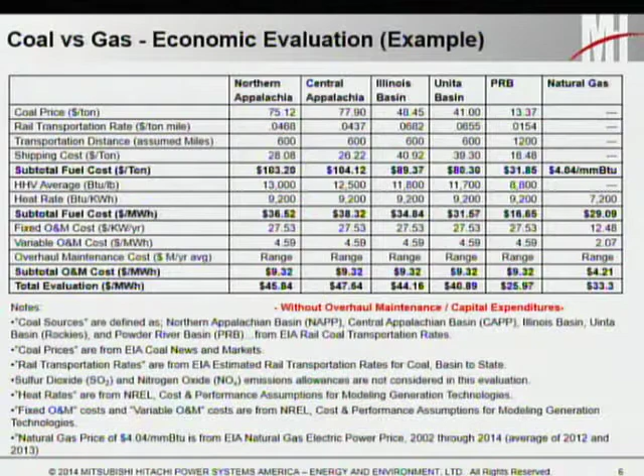So when it comes to an actual natural gas conversion from coal to gas, you have a lot of things to consider. Again, a lot of people think it's just a burner job - you need to change the burner from handling coal to gas, but it's significantly different from that.

You would equate it to changing your car. If you decided, instead of running gasoline in your car, you wanted to go to something as drastically different as coal is from gas, it would be like changing to wood chips for your car. Obviously, there's going to be extensive modifications needed to get your car to work on something drastically different than gasoline and be able to perform at the same speed that you wanted it to.

So the first thing is the boiler design is specific to its fuel source, and not just coal, oil, or gas, but even the type of coal, oil, or gas. So the furnace height in the boiler is sized originally on these coal units for whatever kind of coal it was actually going to burn, and the entire boiler is designed for that.

When you switch it to gas, a couple of things happen that have significant impacts. The main one is the coal flame is very bright and radiant, the gas flame is not nearly as bright and radiant. So inside the furnace, any part of the tubes that sees the flame is going to get much less heat transfer from gas. What that really means is you're going to have trouble making your steam temperature when you go to gas inside the furnace and in your superheat, because you're getting much less heat in that specific area.

Even though you're throwing in the same amount of BTUs, it continues to act differently as it goes through. When you get through the actual furnace and into the convection pass, the back end of the boiler, gas has a much heavier weight to the flue gas constituents, which means it can transfer heat better than flue gas can of coal. Now combine that with the fact that gas doesn't have any ash, which the coal units are designed to accommodate for in the back end - you're now throwing more heat on the back side of the boiler where there's no ash layer covering any of the tubes, and you're starving the boiler for heat on the front side because it doesn't have that bright radiant coal flame.

The last thing I'm going to go into, which is kind of a very controversial thing, is the electrical hazards area on code. Code talk is typically very boring - I only have a couple slides on it, but there are a lot of issues concerning what needs to be done when you put gas near a coal unit that has wiring and motor control centers that were not intended to be close to a gas source.

Because all those wiring and motor control centers are ignition points close to a gas source. If the gas source were to leak, it's obviously a hazard, and per code, you may or may not have to make any changes. But it's a very confusing code, and I'm just going to briefly go into why people are confused and what some people's opinions are.

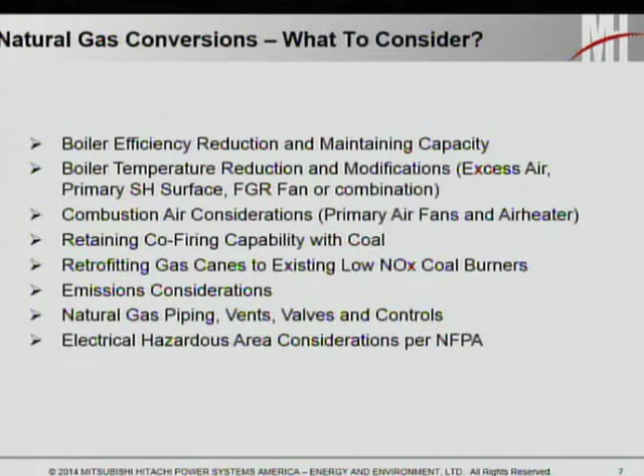So there's very long text here on this, but I'm going to go through each one of these with pictures to make it a little easier.

The first one's very easy. Although your efficiency's down, what do you have to do to keep up? You fire more. Usually the coal units had a spare row of burners, which is very easy to accommodate now - you're going to fire all your burners. You don't need a spare when you're going to gas anymore, so you usually have the ability to add more gas to make up for that lack of efficiency that you're going to get.

But the second bullet here is a little harder to do, and that's the steam temperature. It's very easy to increase your excess air, but you typically don't get a whole lot of extra temperature from it, and it usually doesn't result in getting to the point where you want. You could also add extra surface to your superheater or reheater to get more steam, but that involves changing out very large pressure part components, which can be very expensive, and most utilities want to avoid if they can.

The third one is the most common one, and I'll tell you why. Adding a flue gas recirculation system takes hot gas coming out of the boiler and throws it back into the furnace, where the air temperature going in was much cooler than it is now when you add gas recirc to it. That helps you get to that steam temperature so your steam turbine can still operate where it's supposed to. The second item here we have for reducing your emissions - there are a couple different burners you can do.

A multi-lance burner is the best for wall-fired emissions. That can spread the flame out, but it's a little more expensive as opposed to a solid gun on the inside. You can also add over-fire air if it's not already on there in order to try and get that NOx down a little more.

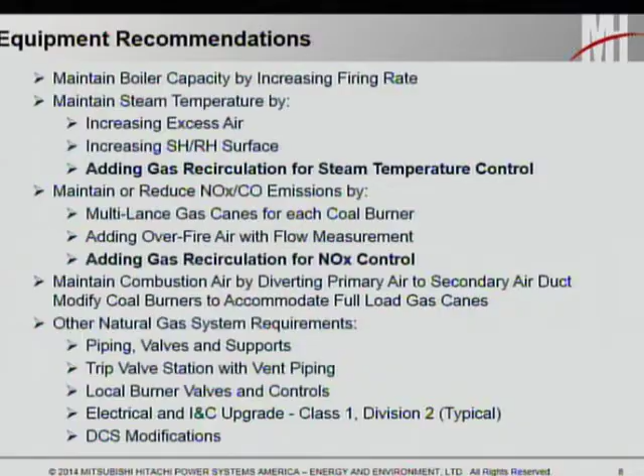And the last one is flue gas recirc again, because you're taking flue gas back in that has much less oxygen than the original air. It's very effective at reducing the NOx. So your two main problems that you have on here are both handled by the same thing, which is this flue gas recirc.

That being said, that's not the easiest thing to do, because now you need to fit something on the back end of a boiler that has fans, foundations, ductwork on something that wasn't typically designed for it. But in a lot of cases, that's the only way you can really get your steam temperature and emission issues resolved.

For your combustion air, when you actually lose your primary air, you need to make some sort of bypass duct in order to take the air you were using to go to your pulverizers and throw it back in so that you don't lose that volume. But that's only on a case-by-case basis. Sometimes it's not needed at all, as a lot of times we found.

And then all the other systems, in order to get the gas from inside the fence up to the actual burner front, are fairly significant when you consider each one needs pressure reducing stations, flow control valves, and vents in order to go to the top of the boiler roof to be in compliance with code. So all those things are a little more expensive than most people realize when they just look at, oh, change the burner out to coal from gas, or from gas to coal, I mean.

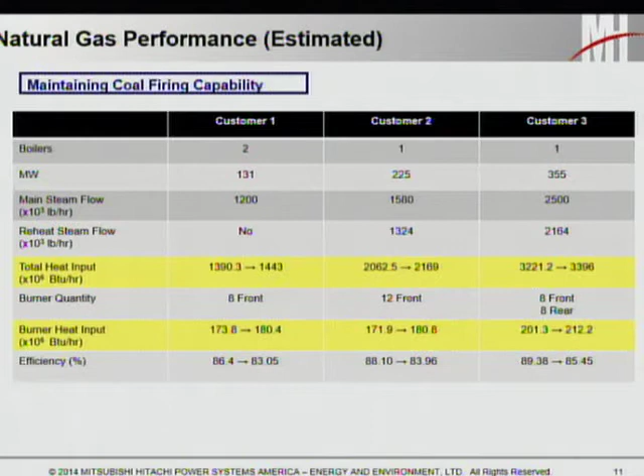So because of that actual loss, you have to make up for that by firing more. So you can see what happens. In order to maintain your capacity, you have to increase the actual heat input you have. That's the efficiency change needed to make up for it, because you don't want to lose any of that capacity that you've already set up to send out to the grid. You already have your switch yard outside ready to go. To not utilize that would be a gross waste of whatever your cost justification is for the megawatts available for the project.

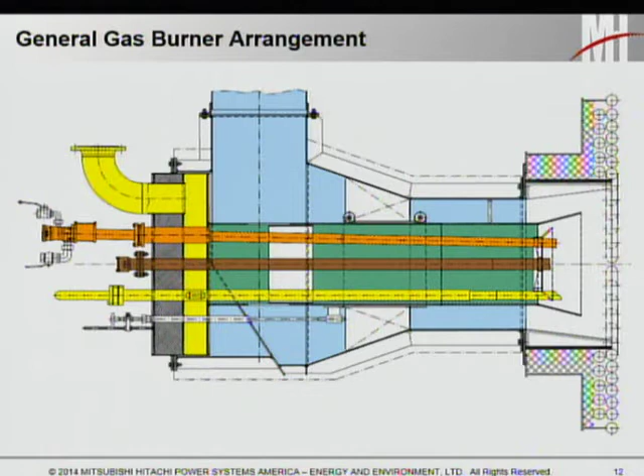So when it comes to the actual burner side, what needs to be done - this is a cross-sectional view of a gas-only burner, just to give you an example. You can see the yellow is a gas spud coming in around. There are typically a bunch of them going right around the face. In a picture, it looks something like this. This is in order to get the best emissions you can - a multi-lance gas burner is the best for it.

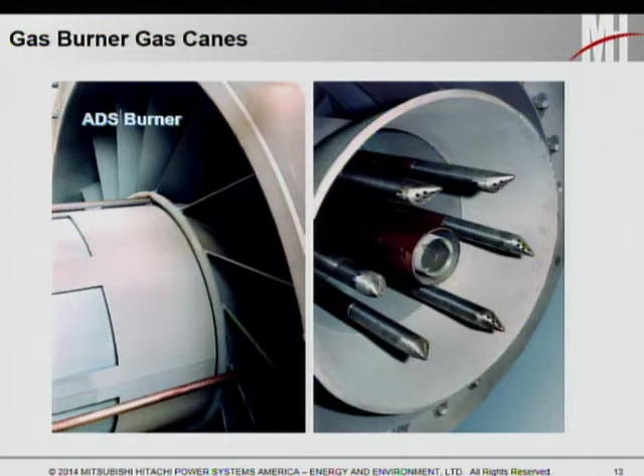By doing this, there are a couple things that you save. The first is, instead of manufacturing a whole new burner and taking the time to haul it out and put another one back in, you're just manufacturing gas lances, and the only time you're taking is inserting those gas lances through the wind box into the tip.

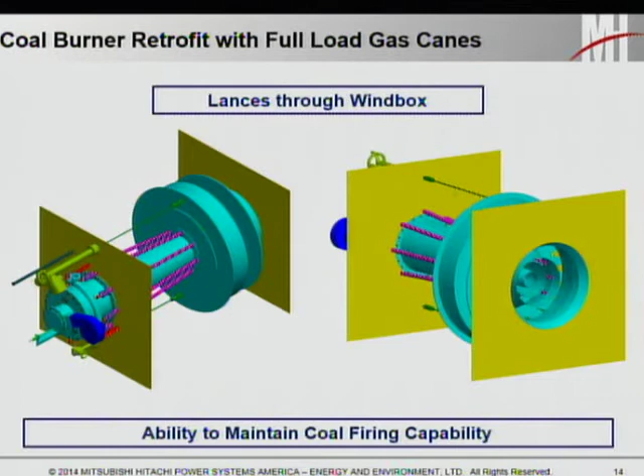You almost duplicate that gas design by putting the tips on the outside, and the coal, which comes down the center, is completely unimpeded. So by doing this, it's not only a cheaper alternative, but it also doesn't do anything with the coal burner in case you wanted to keep it. Whether you want to keep it or not, it's still usually the recommended method, but if you did want to keep it, coal is still a very viable option on this type of wall-fired burner.

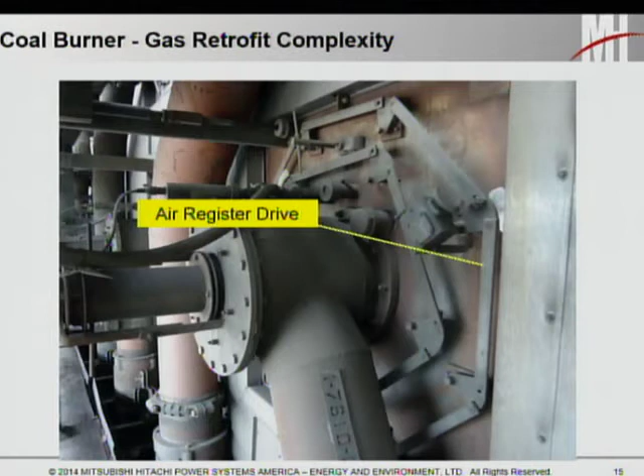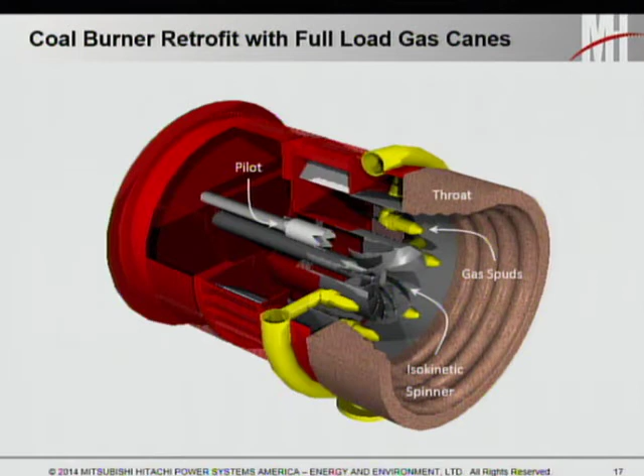This kind of just shows you a cross section here where you have the ring header and it cuts in. And this actually shows a picture of one of the units we're looking at right now. It's fairly simplistic—you have your gas piping coming in, and the performance from a NOx standpoint is almost as good as it is from an actual gas-only burner, except now you can run coal with the same thing, and you didn't need to modify the burner as far as pulling it out and pulling it back in. You're just making small, minor modifications.

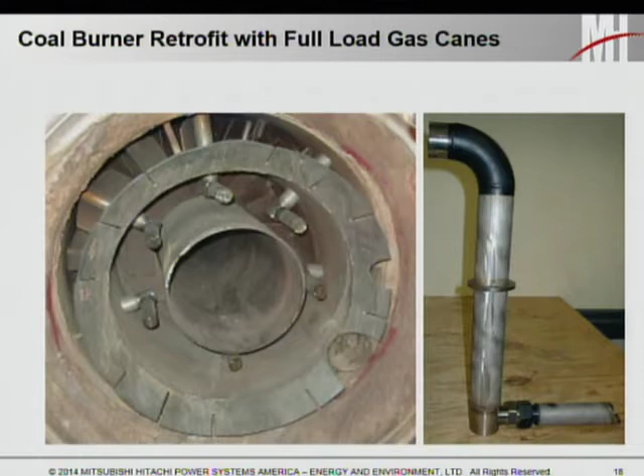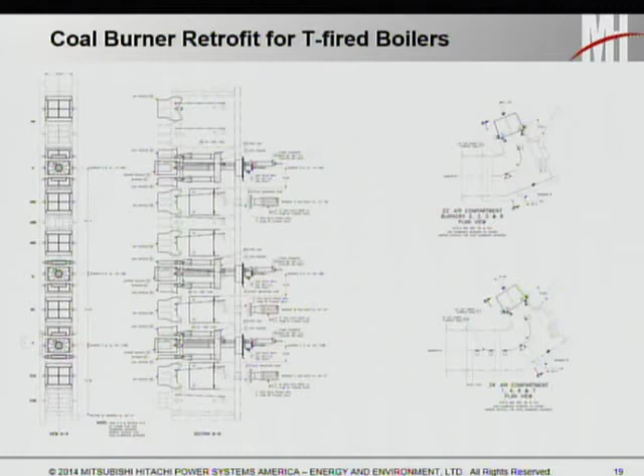We can do this with T-fired units as well. It's actually easier because most T-fired units have spare compartments that were left available for oil or other types of fuels to put in. So it's very easy—I'll show you a picture here.

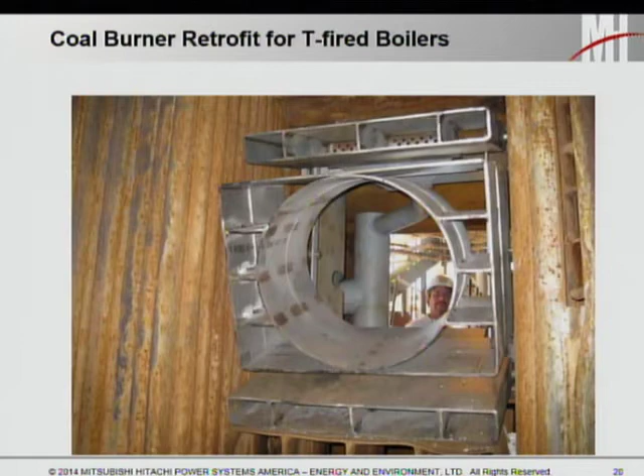These are basically the new gas burners going into a T-fired unit on the top and the bottom. You left this open part here where you can see this is the gas header coming in, and it gets brought in on the top and bottom, and the angle, the tilt, is still fully functional, so you can actually adjust in order to get better NOx production out of it.

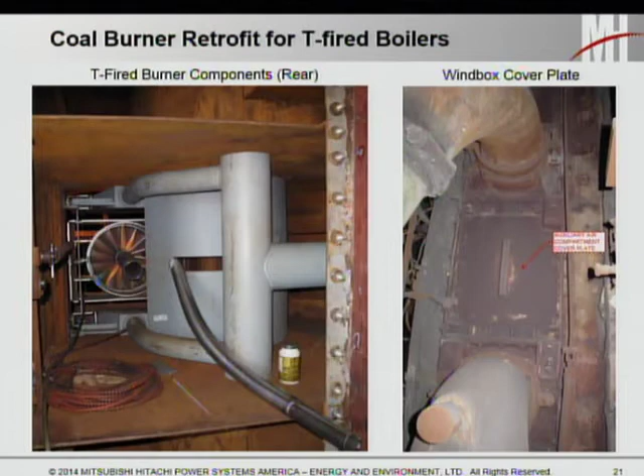This is just a back view here where you can see the two gas spud burners coming in, and from the outside of the wind box here you can see this is the auxiliary compartment that is available on almost all these T-fired units, unless they want three different fuels—coal, oil, and gas—which is very, very rare. This compartment is typically what we'd go to use, and it's actually easier than the wall-fired units. Here's a picture of what it looks like when it's actually operating.

So Flue Gas Recirc is the next item. This, again, is to take care of your steam temperature as well as your NOx emissions. It's fairly simplistic in design, but fairly expensive in installation. When your boiler flue gas comes out, instead of going into the air heater, you take a portion off and put it through a gas recirc fan. This fan has to be controllable to a certain amount so that you can operate it to maintain that steam temperature and the NOx emissions. At low load it should be lower, at high load it should be higher, and so on and so forth.

After the gas recirc fan, you typically send it into the wind box through some type of mixer that blends in with the burners to get your lower NOx. That also provides better temperature, and if you need to, you can also provide that flue gas down at the bottom of the boiler to get temperatures up in a lower case, but that's a little more rare. In any case, this flue gas recirc solves most of the problems, but it has its own expenses with it.

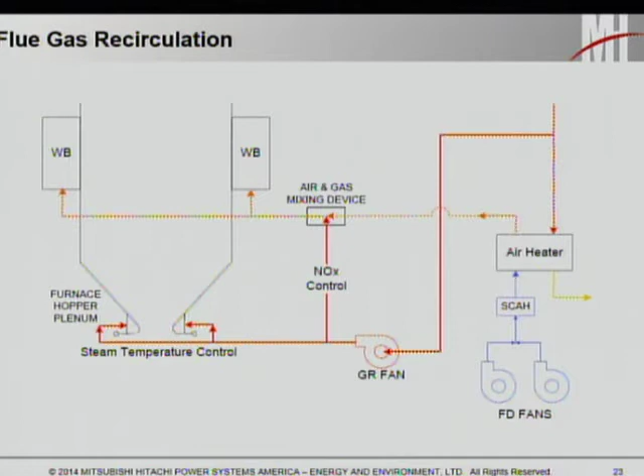On a smaller unit, this is 100 megawatts. It's kind of hard to see with the black, but this is the actual boiler outlet, and everything in color is the new ductwork here. This pink is the flue gas coming into the fan, and then it spits out here into the green, which mixes into the wind box, this dark blackish color going back in. It doesn't seem so bad here, but remember, this is a 100 megawatt unit. It's one small gas recirc fan that doesn't really need a foundation, can probably go on structural steel, and it's not so bad.

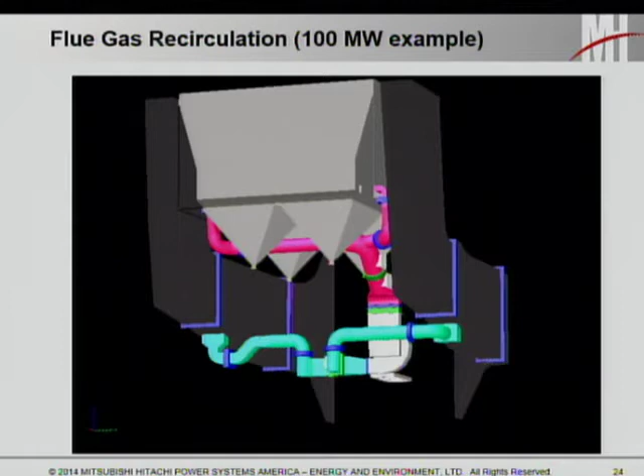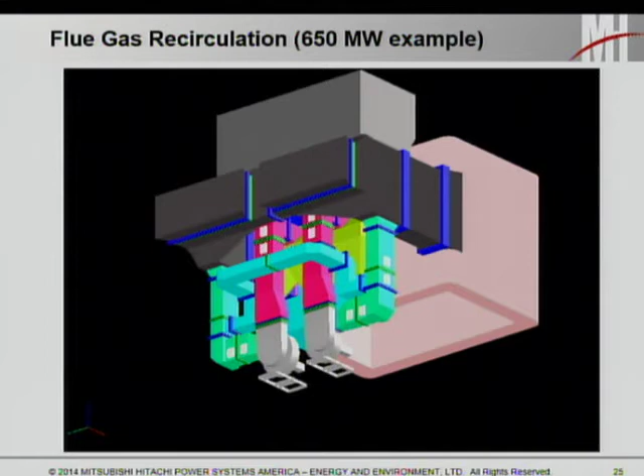But when you look at a 650 megawatt unit, it's much more crowded. You need multiple fans, and these need full foundations and much more extensive ductwork. But again, it's a 650 megawatt unit, so you're getting more bang for your buck. It's just a little more complicated and a little harder to fit in.

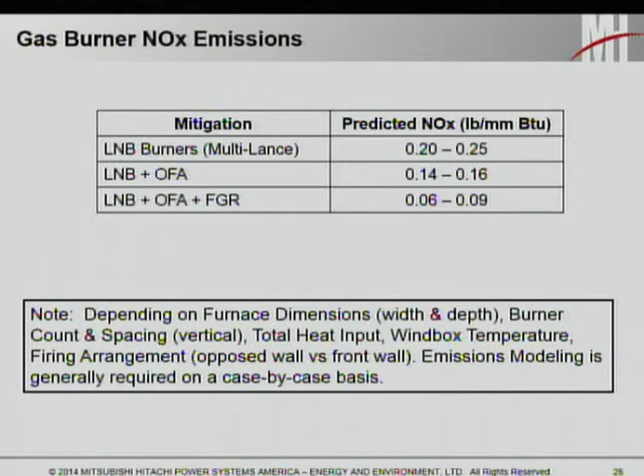One of our clients we looked at had a requirement of 0.15 for two different types of units they had, but their permit was somewhat in flux, and they said we need an option to get down to 0.08. It's pretty easy to do. We're still in the design phase, so the flue gas recirc used was 7% and 10% for each of these units. To get to that 0.08 guaranteed, we just dumped a lot more flue gas back into it.

So it's very easy to achieve very low NOx numbers when you convert these units. It's just a matter of whether you have the room for these large flue gas recirc fans and ductwork, depending on what your number is.

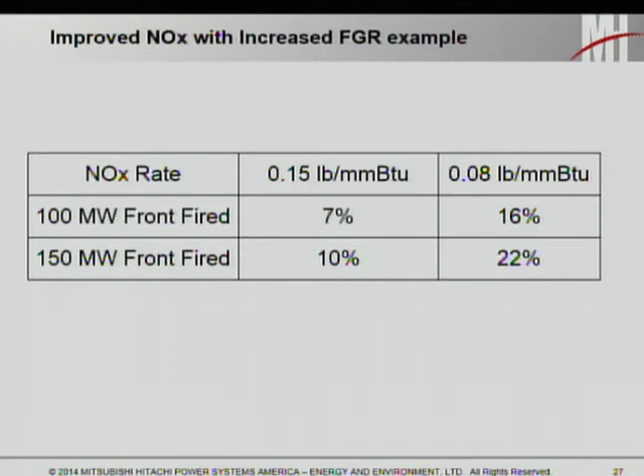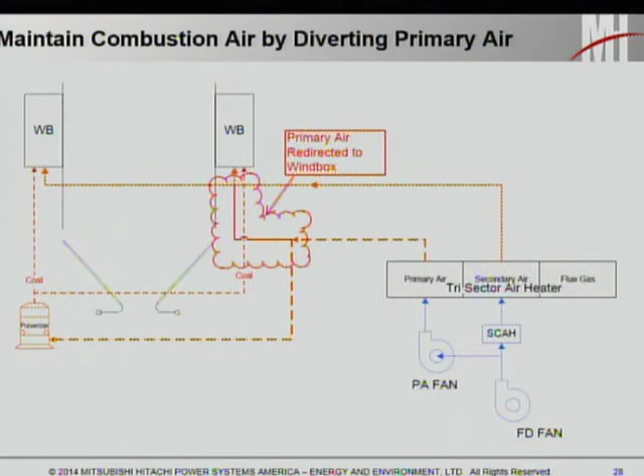The last option here is, if you have an issue where you don't have enough air because your primary air is cut out when you demo your pulverizer and coal system, you can easily create a bypass duct to go back into the wind box to assist that. Again, fairly simple, but depending on your unit, that might cost just a little too much based on your evaluation. These are just things to consider.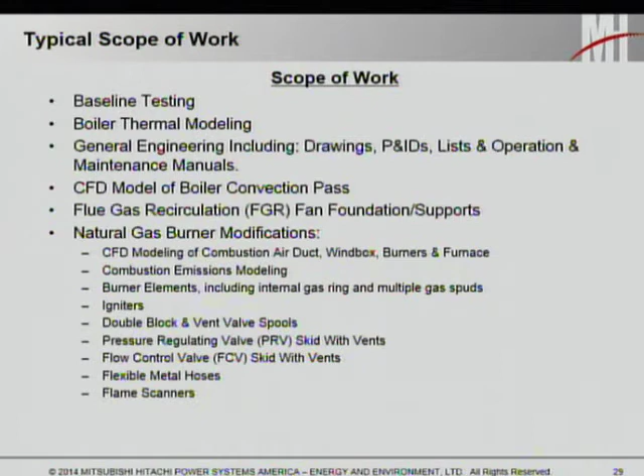I'm not going to read all these, but I want to go into the general scope of work involved with any of these. It involves quite a bit before you actually lay down anything — all sorts of baseline testing, CFD modeling, and the actual burner modification is just this part. All this other stuff is in the design phase and what you need to procure in order to meet the requirements. And then there's a second page as well.

This is all the other stuff that's needed. Again, it's not just a burner change-out issue. All this stuff is required to make sure your boiler is going to perform for your steam turbine, with your megawatts, in order to get where you need to go.

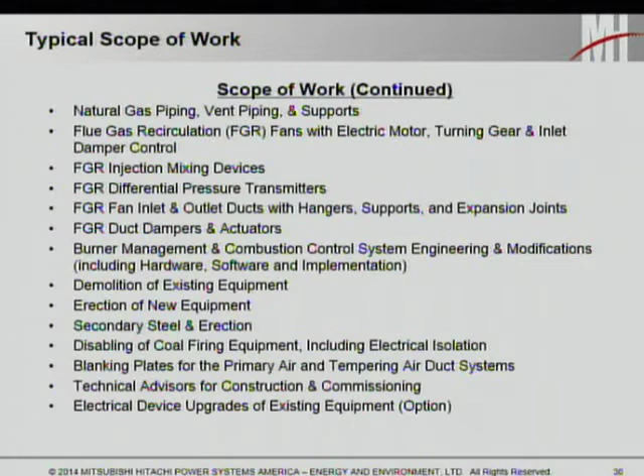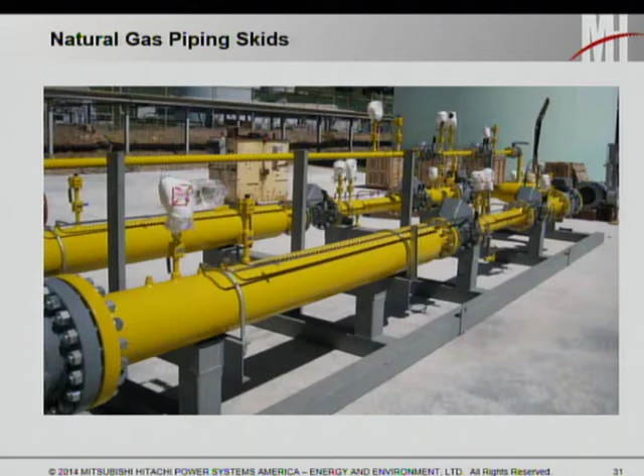This shows an example, even from a gas piping standpoint — it's fairly involved, not just running one pipe from the fence all the way up to the boiler. There are lots of pressure reducing stations. You need to keep reducing it down, diverting between multiple units at the same site in many cases. Once you get up to the actual burner deck, you have several valve stations like this to control the actual gas flow to each burner.

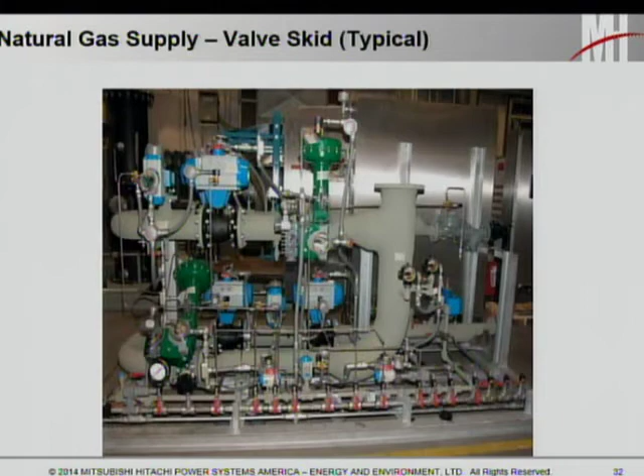So again, the three largest scope items are the flue gas recirc if it's needed — the ductwork, the fans, the foundations — running all the gas piping, and then the smallest of those three is actually the burner modification, which is usually the only thing people think about up front. This diagram just shows you what it looks like for the gas piping and how detailed it is.

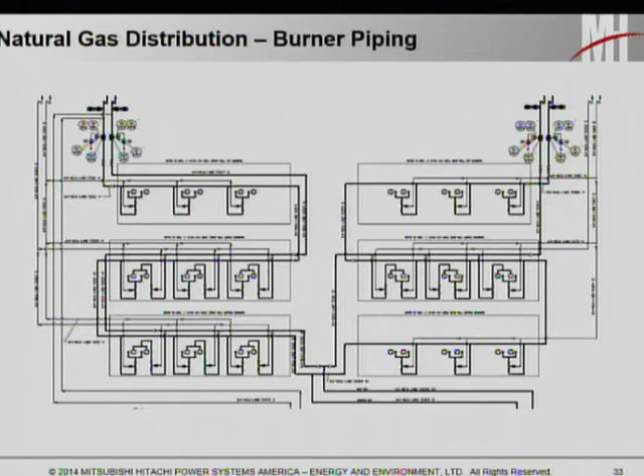So the last thing I wanted to talk about is really the stickiest situation here, and that's the NFPA code. I am by no means a code expert, but there's a guy at my company who is, and he taught me whatever he could in a 15-minute lecture.

Basically, if you're introducing gas into a place where it did not exist before, and there are electrical components that can create a spark, there are 3 different sections of the code that address it. Unfortunately, they don't all agree with each other. The first is that the extent of a classified area is 15 feet from any point of discharge.

Point of discharge means where you could have a potential gas leak, which is just about anywhere on the gas pipe. So if you're running this gas pipeline a quarter of a mile, you need to measure 15 feet from any potential leak point to look for any potential ignition sources. From this standpoint, it seems pretty clear cut and dry. You need a 15 foot area in order to make sure you're in compliance.

Now, any of those spark sources can be upgraded to be explosion proof or rated within code, but that's very expensive on some of these old units where you have wiring from 50 years ago that's still sitting there that you don't really want to touch. So at least from this, from the NFPA 70 NEC code here, it sounds like you have to do it, but there's some contentions here.

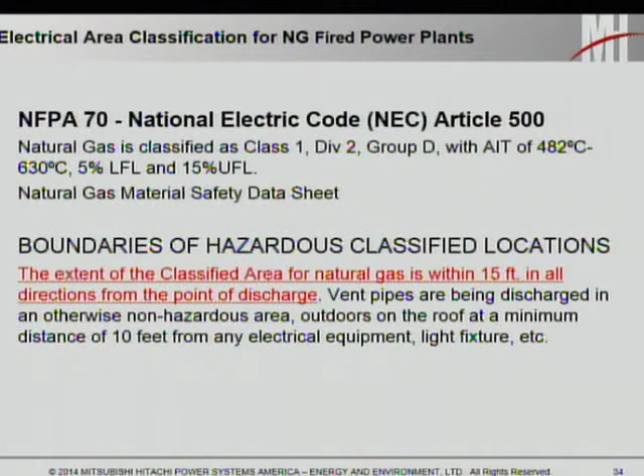When you look at NFPA 85, it says all equipment shall conform with the National Electric Code. Okay, that's fine, but then there's an asterisk. When you look at the asterisk, it says, locations - and I won't read the whole thing - but basically it says normally not considered hazardous locations. So this one basically says if it's already there and there's a boiler present, you don't really need to worry about it. It's not considered hazardous.

But the title of the chapter says it's only applicable to single burner boilers. So some people take this sentence and say, well, it says I don't need to do it. I don't necessarily know if they really meant to say that, so I'm not going to go with it because it's a little dicey.

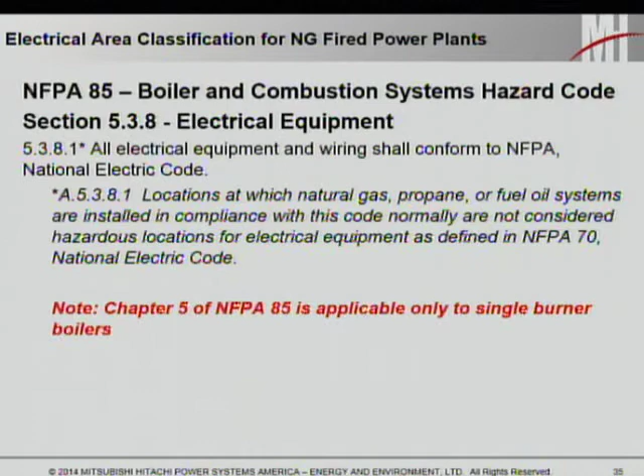The 3rd section of the code, which is NFPA 497, reads pretty clear cut here: open flames associated with equipment such as boilers and fired heaters that are inherent thermal ignition sources, meaning a boiler is designed to take fire, it's designed to operate in this way.

It says electrical classification is not appropriate in the immediate vicinities, which means there's your get out of jail free card - I don't need to do it at all. It's very clear, very cut and dry, unlike the other 2.

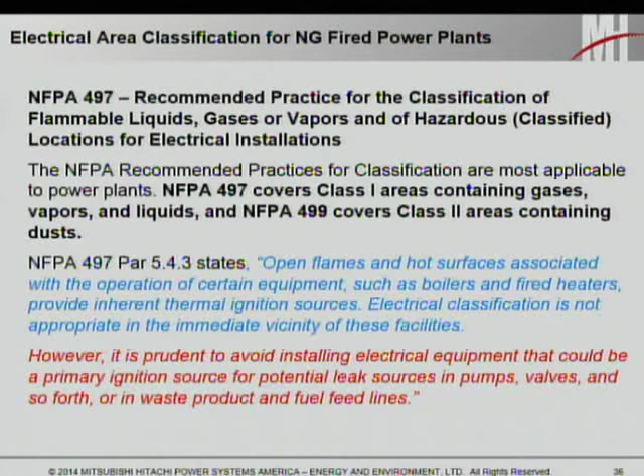And then you read the next sentence: however, it's prudent to avoid installing electrical equipment that could be a primary ignition source. Well, what the heck does that mean? It means I can't do it, but, well, you don't have to do it, but it would be very prudent to. So there are various opinions on this subject.

To be honest, as one of the OEM vendors, we really don't want to get involved with it. We want the utility to decide what is best for the utility to do in order to be in compliance. And I'd be lying if I told you everyone said it has to be done and we're going to follow the code from the conservative approach.

We've seen RFPs from both stances where they say, we just want you to replace what's there, don't worry about anything else. We've seen stances that say, please make sure you put a proposal in to change out everything within 15 feet of the natural gas pipes that are coming in.

And we've seen other proposals, which is our least favorite, which say, why don't you determine what's needed and tell us what to do? And I can tell you, in every case where we get that, we are going to take the ultimate conservative approach, because we do not want to take any chances with any code violations, or more importantly, any accidents that could occur based on providing equipment in an area that could or could not be a hazardous location.

So that being said, I'm not a code expert, but I'm smart enough to know that confuses the crap out of me, and I don't want to touch it. That being said, that's the last slide I have, and I'll still take any questions.

Anyone? Anyone have...